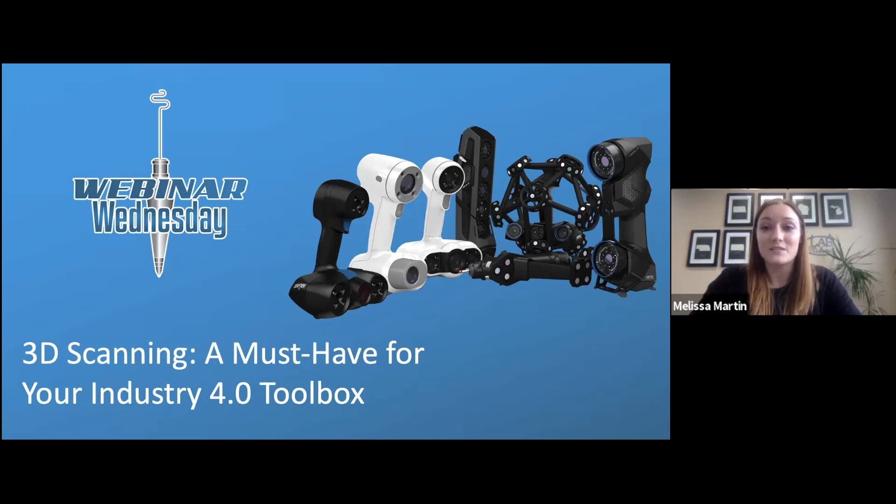We are talking all about Industry 4.0. It's a word we talk about often here on Webinar Wednesday, and there are a lot of different definitions out there for what Industry 4.0 is. But one term we really like to use is cyber physical systems, this whole idea that everything happening in the physical world, in our manufacturing facilities and industrial plants, is now being digitized. Smart sensors and smart devices are bringing everything from the physical world into the digital world. Some other terms you might have heard are smart manufacturing or digital transformation.

So where do all of these technologies fall? If you ask anybody to list off Industry 4.0 technologies, they'll have a whole long list. One way that helps us understand how to put these into perspective is if we think about it with the metaphor of a toolbox. Industry 4.0 has this whole range of different technologies that are really just tools to help us create cyber physical systems. So we did a little digging and found a list of our own that we really liked from IoT Analytics. If you ask anybody to list Industry 4.0 technologies, you'll have long lists, you'll have short lists, but these are some of the key technologies you'll often see.

One thing these have in common is that they're all cyber physical technologies — technologies that help us take what's happening in the physical world, use smart sensors, data analytics, and computing to pull data and bring it into the digital world. Things like augmented reality, cybersecurity, digital twins, edge computing, etc.

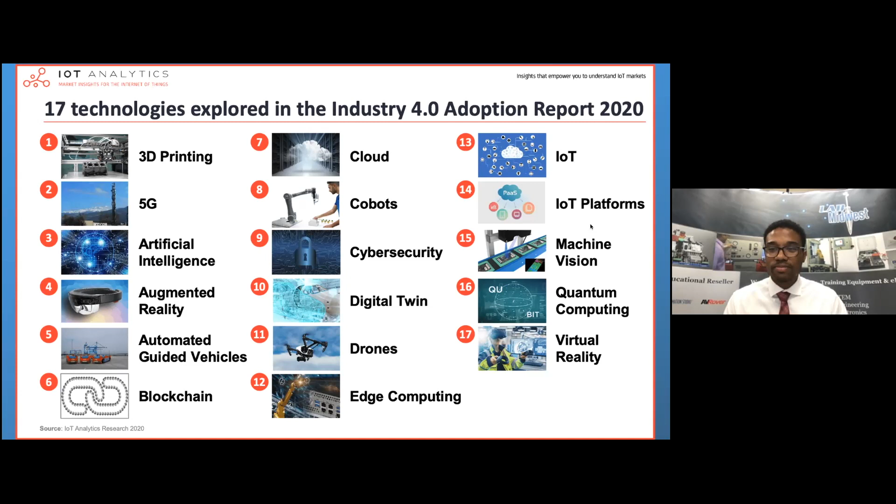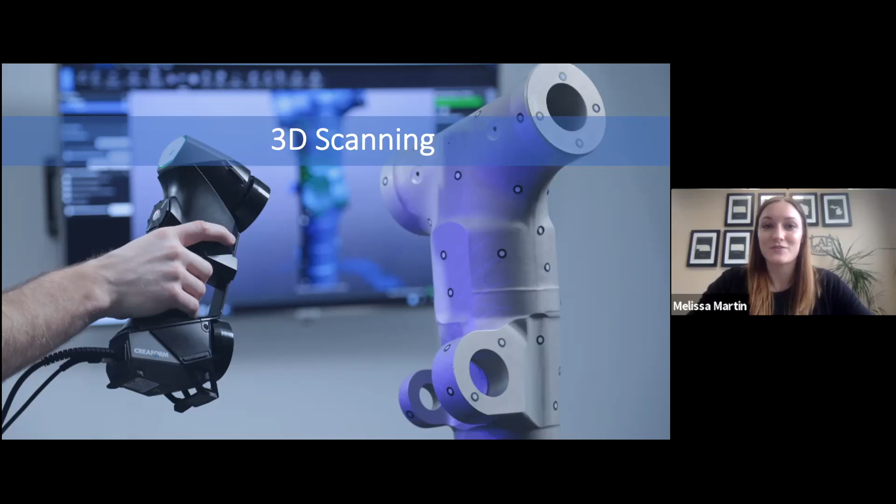One thing that's really important to us here at Lab Midwest is that we're not just playing with cool technologies for the sake of technology. We want to make sure there are real industrial applications. So how are manufacturers using this technology today?

One of the most common 3D scanning applications we see in scanning and software is quality control. Having the ability to measure objects for analysis of the dimensions is providing huge value to industry. Think of a manufacturer getting a lot of returns for a faulty component who wants to look into why that is and gather more information on how to improve that process over time. So he scans that part, or scans each returned part, and compares them to a certified part, in order to collect the data to identify weak points and improve that quality and reduce the likelihood that it would happen again over time. So quality is huge for 3D scanning.

Reverse engineering is also very common, allowing an individual to extract all the different dimensions and sizing and replicate and recreate it in a CAD file. For example, a manufacturer needing to rebuild a part for a product that is no longer being manufactured.

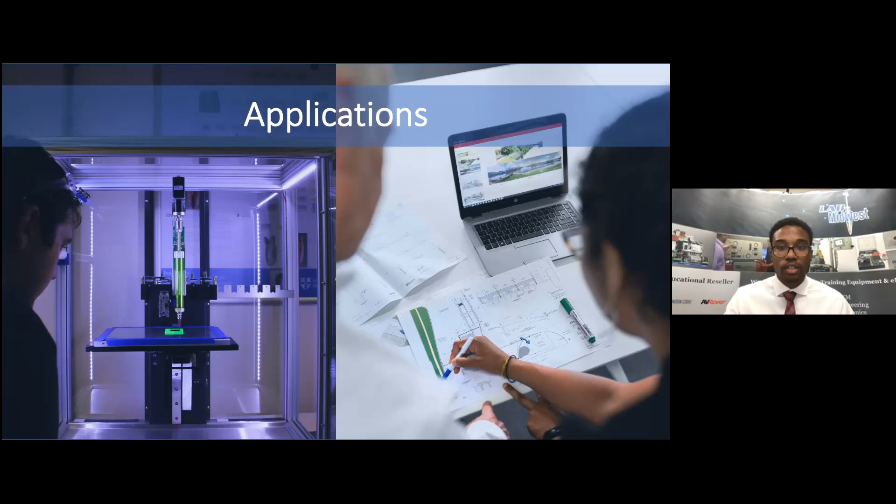So now they can scan a part that they have for a reference, and they can recreate it, 3D print it, and use it on their production floor, then save that CAD file for future use. These are just two general examples of how we're seeing this technology being used in automotive industry, construction, aerospace, healthcare, and of course, manufacturing.

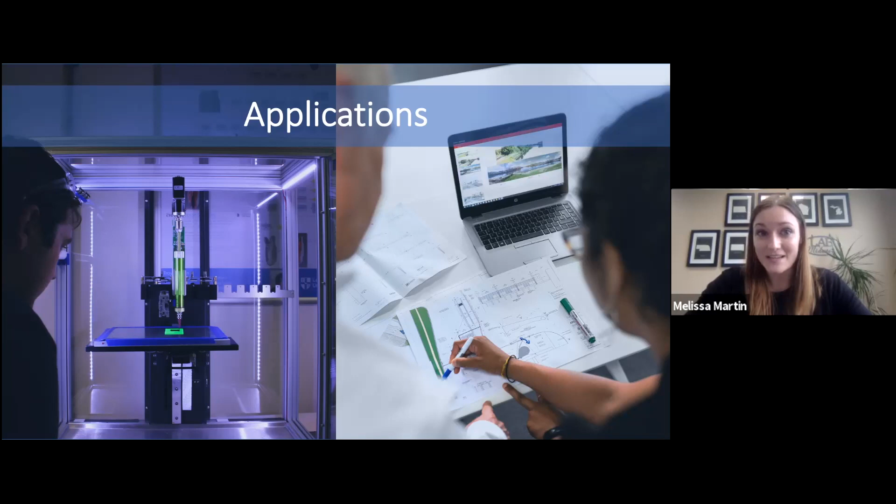Yeah, absolutely, that's amazing. We talk all the time about how Industry 4.0 is so much more than just manufacturing, it's bleeding out into all these other industries. And we know there's no job title called 3D scanner, so what are the types of career roles that students exposed to this technology in their education pathway could have in the workforce that might use it?

Yeah, that's an awesome question. We're seeing a growing market for 3D scanning across every industry, and it's creating a huge opportunity for individuals skilled in this application to fill gaps in areas like product design, engineering, inspection, and quality. Some of the more specific roles would be mechanical design, engineering, electrical mechanical maintenance, quality control, quality engineers, quality technicians as well. These are just a few examples.

You named technician, you named engineer, so certainly there's applications for students going direct to workforce out of high school. There's opportunities for students who have a 2-year technical degree, and there's also opportunities for students in that 4-year engineering pathway to utilize some of these skills in their careers.

So Ivan, I think we've got an understanding of how this is being used. I think our audience really wants to see what this looks like and dig deep into the technology itself. So I'm going to ask if you can give us a little demo of our Creaform scanner. First, help us understand the actual scanner itself - is it just like a fancy camera? Help us understand how it works and the components there, and then maybe give us a little demo of how it scans an object.

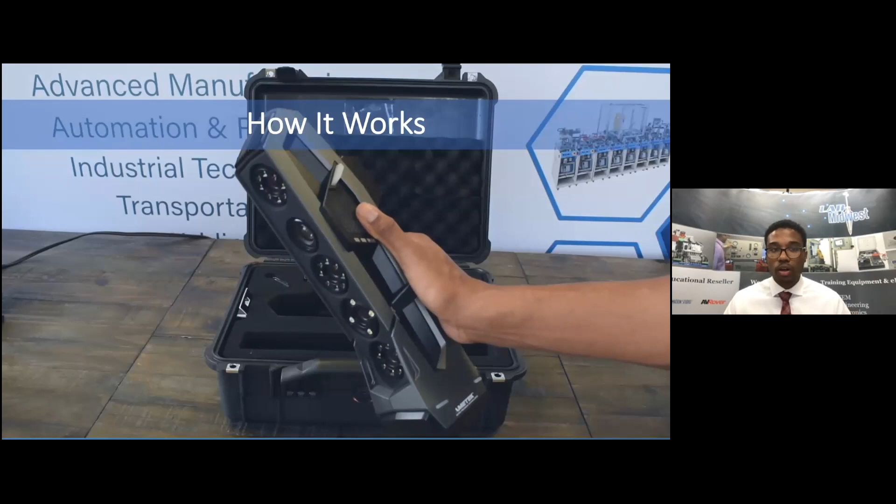Awesome, yeah, okay. So here is our Creaform GoScan. This is the scanner that I use for all of the demos that you'll go through today. The first thing you're going to notice are the cameras and all the cool sensors at the front of the scanner. It has 3 high resolution cameras, all used for tracking all the different geometry of an object. There's a color camera with 200 DPI, used to differentiate the color textures on an object, as well as all the different components from the lights to the dark.

It functions with 50 microns of accuracy. It measures in a resolution of 100 microns, which is extremely precise. It's going to have a measurement rate of 1.5 million measurements per second. So this thing's fast, and all of these different components and benefits work together to create a high quality scan surface.

Each side of the scanner, you'll see later in the demo, there is a distance meter. So it tells you when you're too close, it'll light up red. When you're too far, it lights up blue. So it gives you all the data so you can optimize your scan. And there's buttons on each side of the scanner that are preset to work with the program or software you're using, but you can, in certain cases, specialize that to your specific need.

To just sum it all up, the GoScan 3D, the one I'm using for the demo, is super lightweight, fast, and extremely accurate. So now what I'm going to do is transition and show you it in action.

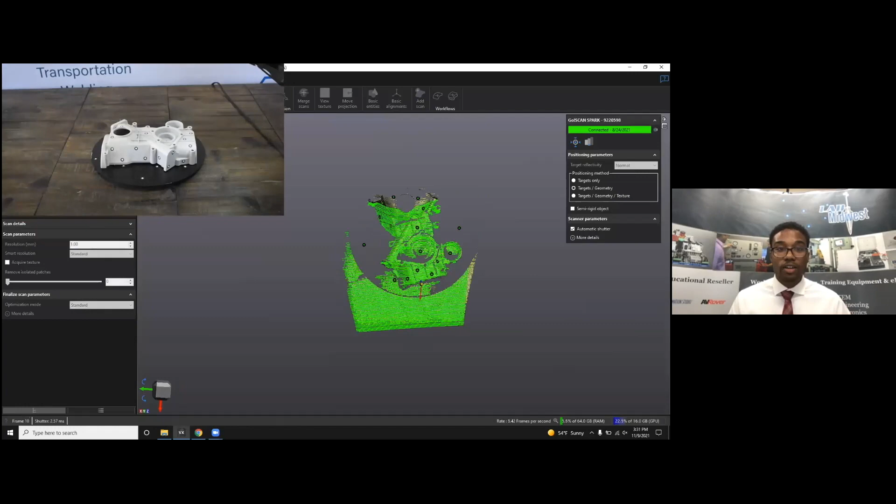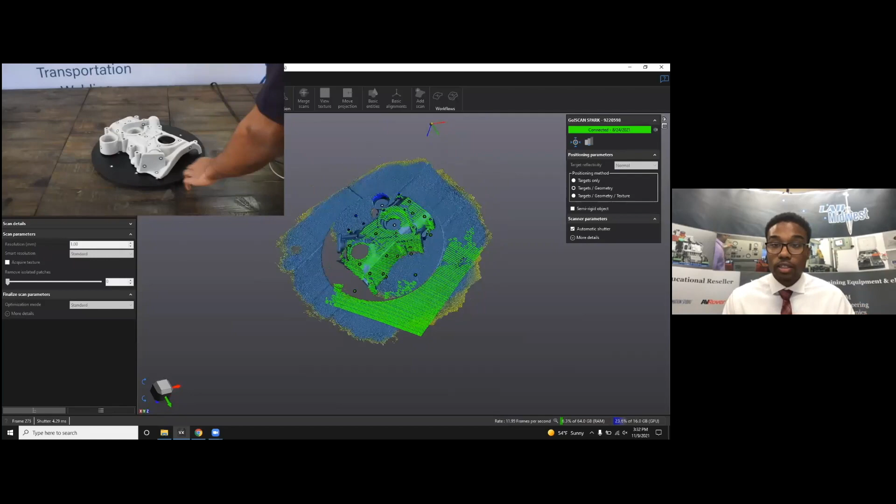This is a video that I recorded in our tech center, scanning a part. At the top left, you'll see me actually scanning the part. In the main image, you'll see what the VX Scan software is producing. It's able to gather all the information from the part - the geometry, the texture of the part, where the targets are placed if you're using targets. And it tracks and creates positionings used to shape out that digital representation of whatever you're scanning.

The scanner is emitting 99 different white light scanning lines onto the part, and it's tracking the distortion of those lines with the 3 cameras in order to replicate that surface in the digital mesh.

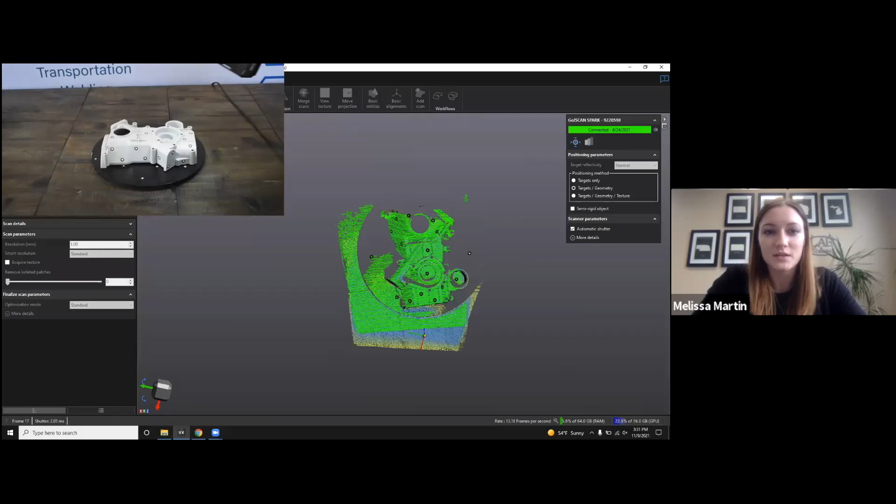You mentioned targets, and I'm assuming that's those dots that we're seeing on that part. Can you help us understand what those are used for exactly?

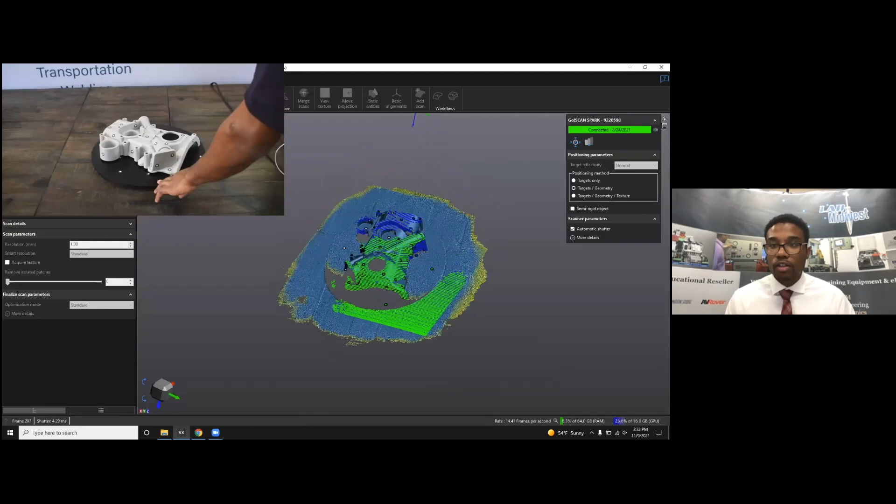The targets, in this case I use on this part, assist in triangulating the mesh across the component. This increases the accuracy and provides a better reference. Think of it like an anchor for the scanner, so it doesn't get lost if the object moves around, if you shift it on the table, or if you need to reorient it to get a better scan.

They're also great if you're scanning a larger surface that doesn't have a lot of geometry, like the hood of a car. In that example, you'd use targets so you can differentiate the hood of the car from just space. That makes a lot of sense, thanks for explaining that.

So we've scanned our part, we've got the mesh here in our software. What happens next?

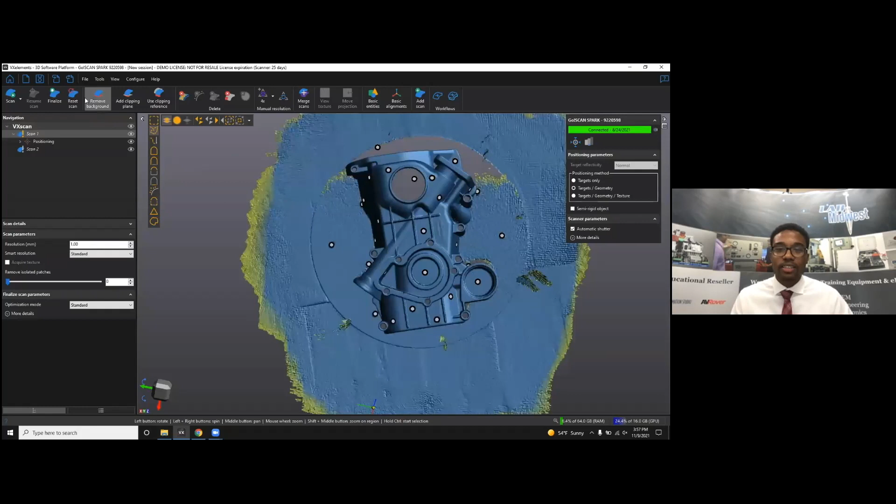Okay, this is my favorite part, the editing side. So after you get your scan and all of the raw data of the component, now you can go in and clean it up and make it into the 3D model.

I started by creating multiple clipping planes, and that was to get rid of some of that noise that we picked up from the table and the surface area that I was using.

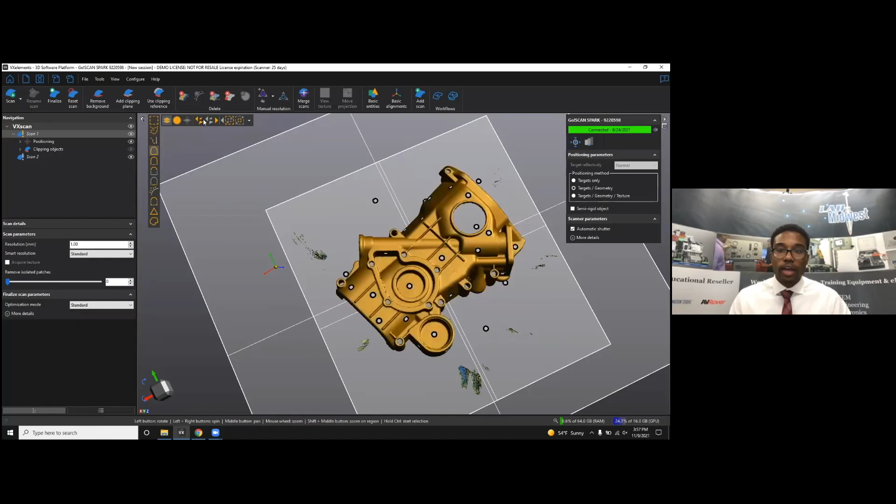You'll notice that there's still some noise scattered around the area of the part. That's from my hand when I was turning the table, it was picking up my sleeve a little bit.

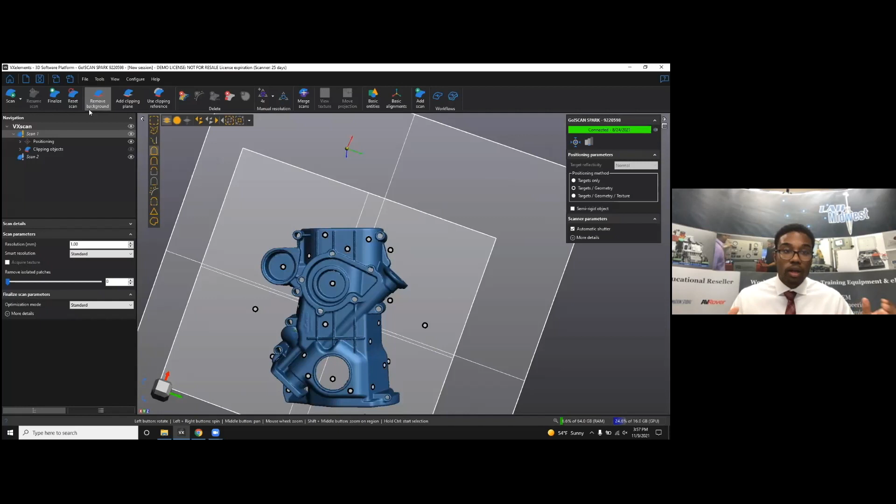So what I did was isolate the part and delete all that additional scan data that wasn't associated with that selected area. Now we're ready to go back through, take a closer look, fill any unwanted holes, rescan it, and go into that refining process.

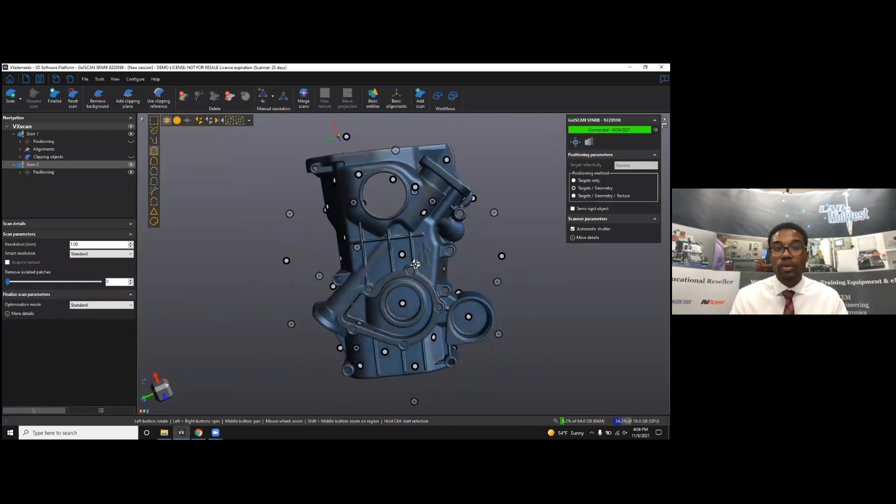What you're seeing now is a second scan that I added to this scan, which was the underside of that component, and I was able to quickly merge them for the purpose of this demo. So now we have our 3D model, a complete scan of that part.

Wow, that's really fascinating. So you did all of this in VXscan. What other softwares are available?

As you mentioned, I was using VXscan for that demo, but VXmodel is going to be perfect for product development, reverse engineering, and the components of scanning in order to replicate or recreate a tool or a part. VXinspect is oriented towards your quality side, being able to measure parts, check for faults, make sure that it's optimized to standard.

VXtrack is going to be ideal for, I didn't really go into it up till now, but the MetraSCAN that works on the end of arm on a FANUC robot, and that's going to provide dynamic tracking and assembly control monitoring for that purpose.

So lots of different things that we can do with that scan once it's been completed, which is part of our conversation today, right? We're talking about this as just another tool in our Industry 4.0 toolbox.

So we've created a digital version of this physical item. What do we do with it next? How can we use this with other technologies?

Once we create a complete scan, we now have all that data we collected and saved, which we can use in a wide range of advanced manufacturing environments.

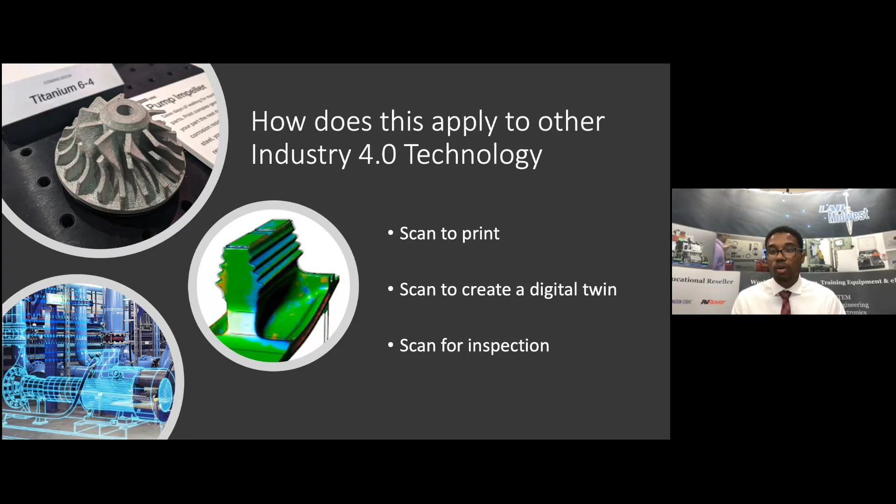It sounds like there's some great applications here, and I'm sure our audience will come up with a whole wide range of other applications, or their students, very creative.

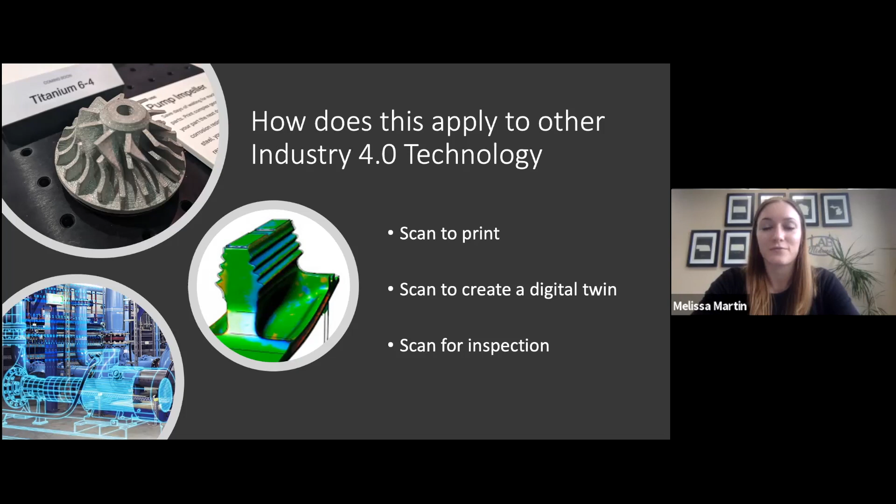Help us understand, because I know what we saw, what you demonstrated was just one scanner of a whole wide range of educational products that are available through Creaform. So can you help us understand how these scanners are being used in education today?

There's two educational packages, one for teaching and the other designed for research purposes. I'll start with the teaching package, on the left. It includes three professional grade scanners, the Academia 10, 20, and 50. This package is ideal for teaching metrology at the high school level, technical college level, and university level. It can be integrated into a wide range of areas: science and engineering, applied science, industrial design, natural science. These are just a few. It covers everything from product development, production, conformity inspection, to reverse engineering, assembly assistance, and all the other skills that work in line with Industry 4.0.

Now, the research package on our right includes the lineup of metrology grade scanners: the GoScan 3D, the MetraSCAN 3D, which is my favorite, and the HandyScan 3D. It also includes the Handy Probe, which is the portable CMM. This package is typically seen in technical colleges and university research programs. The fields of study are the same, with slightly different applications on the curriculum side, but the field of studies remain very similar to what I described for the academia or teacher package.

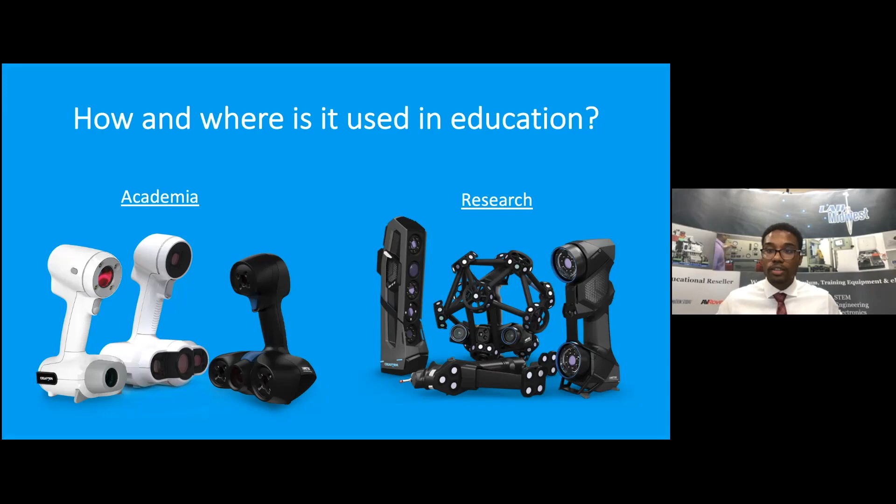And you said the golden word there, curriculum. As many of our audience members will know, we don't do anything here at Lab Midwest unless it has curriculum associated with it. So Ivan, tell us a little bit about the curriculum and what students are learning as they go through the Creaform package.

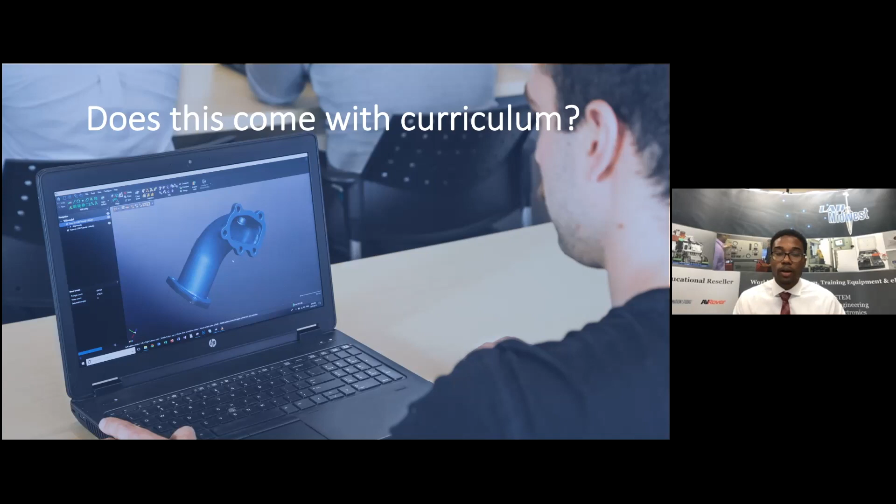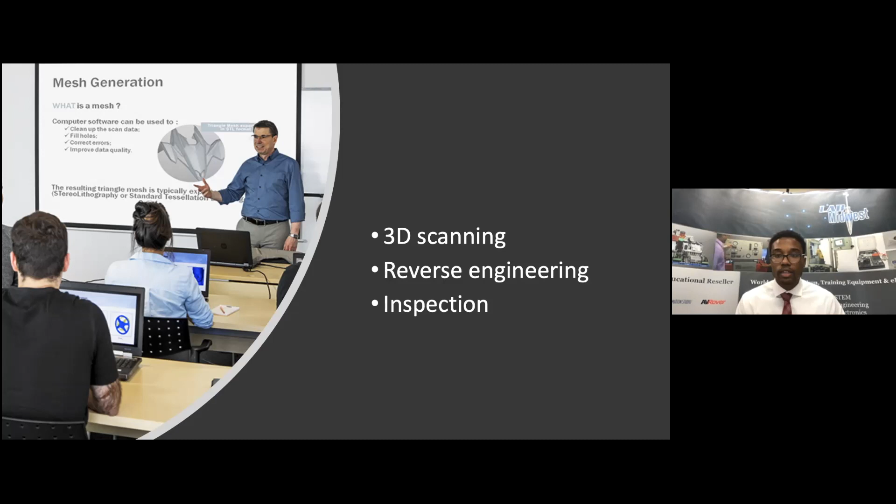As I mentioned, it's going to align with the two packages I described before. The curriculum includes all of the teaching materials, which are industry standard, and covers three main areas: 3D scanning, reverse engineering, and inspection. It provides unlimited web access to all of the lectures, lessons, tools, everything you need to create a really in-depth program for your school or institution. They're designed to teach all the real-life applications and deliver hands-on instruction, and all of the resources are structured in a way that's easily integrated into any engineering class or lab.

Thank you, Ivan, for showing us the demonstration of this technology and for talking a little bit about the availabilities for our educators. At this time, I would love to transition into Q&A for our audience.

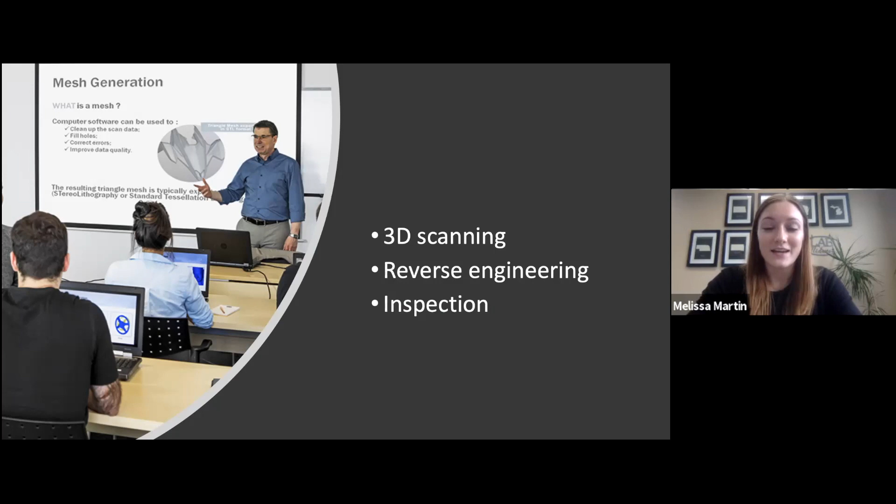Ivan, we have gotten a couple of questions from our audience so far. The first one, to no surprise, because I know this is a new technology for a lot of our educators, is it difficult to pick up, and are there instructor resources that will help me learn?

Awesome. Yeah, that's a great question. The system is designed to be easy to use, but Creaform has created an extensive library of resources for teachers and students to get you up and running as quickly as in 30 minutes.

So all of that's included in the package that you would purchase with the scanner on the academia package.

Another great question from our audience: are you able to scan shiny surfaces? That's a question that comes up a lot. Reflective, transparent, shiny, very extremely shiny surfaces are typically going to need to be powder coated. So you would spray on a coat, and that's just going to assist the scanner in being able to track the different edges of the part you're looking to scan. So you can't scan glass, but if you put a layer of coating over it, then you would scan it very easily.

Here's an interesting question, Ivan. Are art programs using scanning? Yeah, that's huge. We're actually seeing that being very popular for art restoration and saving. So we are seeing a lot of art programs, design programs adopting this technology as well.

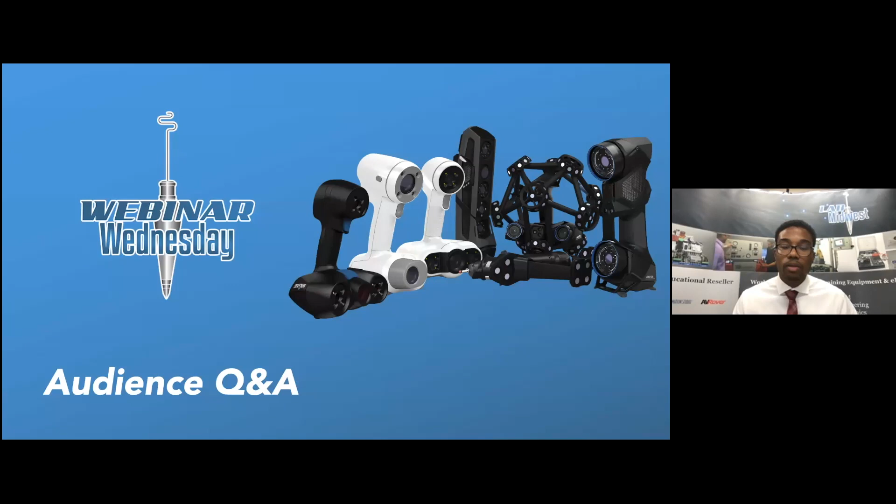Oh, that's a great question. So these scanners, they're going to scan more personal items, like the size of a square foot area, and then to remain accurate. Because once you start scanning larger items, then you lose accuracy. The MetraSCAN, that is going to be used for larger areas. You can scan an entire car, you can scan much larger. But the hand scans, to remain the most accurate, you're going to want to stay within that square foot radius.

Ivan, that's a great point you made, that it really does depend on the scanner, and you lose a little bit of accuracy over space. We can certainly provide spec sheets for what the accuracy is for each of those scanners. As Ivan mentioned earlier in the presentation, that MetraSCAN, that kind of hexagonal shape, goes on the end of a Fanuc M20 robot. So this is just a huge industrial robot arm, and they're using it mostly in the automotive industry to scan entire vehicles, as Ivan mentioned, for accuracy as they're going through the design process.

Ivan, thank you so much for your time today, for joining us on Webinar Wednesday and sharing incredible insights into this whole area of 3D scanning. I know it's an area of technology that a lot of our schools are picking up on and using, finding really creative ways to use it across multiple programs, whether it's their industrial arts program, their career and technical education program, their engineering coursework, or material design, whatever it might be. There's a lot of uses for this, and we're excited to talk with any of you about it if you're interested.